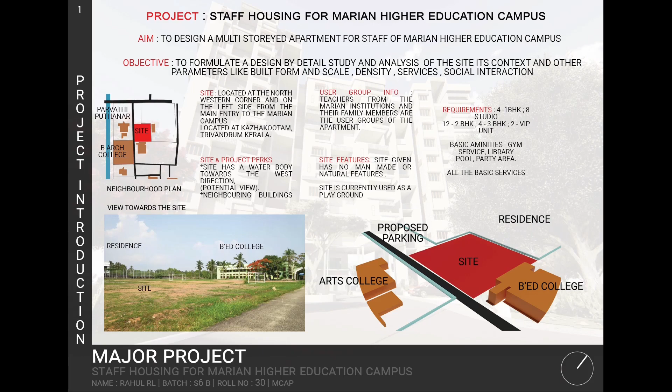Coming to conceptual evolution: the main conceptual idea is to bring a residence-like feel to the apartment, enhancing user comfort and traditional feels, achieved through factors like yard spaces, bringing interior and exterior relation, privacy and isolation for each unit, and providing more ventilation.

Now about the yard spaces. The courtyard I created here is a double height space connected to all the common spaces in the unit like the living area, dining, and the kitchen. This area increases and exposes the volume of the interior spaces, enhancing natural light and ventilation.

Further connecting to the other yard spaces, it brings openness to the building. By achieving the court space, the need for increasing privacy through privacy walls and an increase in ventilation through the newly increased volume is seen.

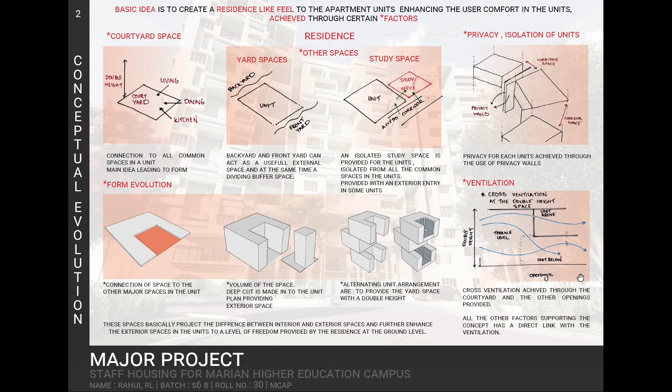Coming to zoning: zoning is done by factors like orientation. The orientation of the building is to avoid the summer sun by facing the court spaces against the sun, also aligning it to the wind direction, and to provide a good view from and towards the site.

Further, the site is zoned prioritizing pedestrian pathways by minimizing the road networks. The part marked in the plan is the park area, providing a buffer to the site from its nearby educational context.

Coming to unit level zoning: this is completely done prioritizing the courtyard space. The alternating plan provides the courtyard space with a unique privacy issue, which was solved by the privacy walls. The vertical circulation cores provided at each corridor are accessed by all three units, and the central units access alternate between A and C as going up the levels.

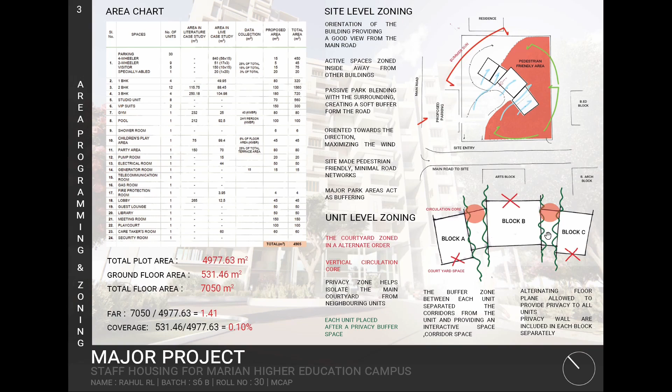Coming to the site plan, this shows both entrances to the site, the vehicular as well as the pedestrian. It also shows the road and pedestrian network throughout the site. The ramp to the basement parking is also shown.

Most importantly, both the parks, the active park and the passive park, are shown in the site plan. The active park, located at the back or east end of the site, has a playground, a cafe with seating, and a stage space, whereas the passive park has a children's play area and a seating space. Both parks act as a buffer from the context of the apartment.

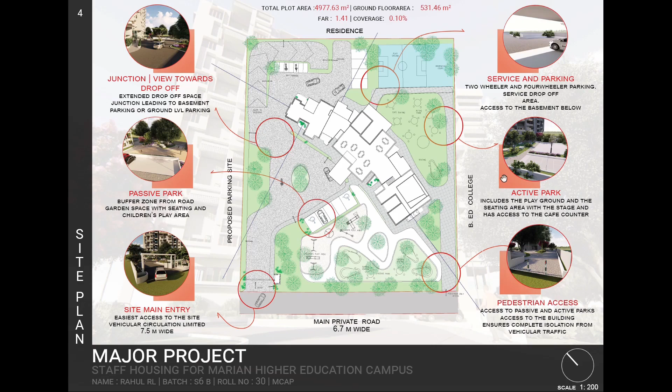Ground floor plan: the immediate site features are marked around the site. The reddish color in the plan denotes service areas and the yellow color denotes public areas. So the private areas like the caretaker's room, electrical room and other service areas are mostly connected to the road network, providing vehicular access to the service areas.

But the public spaces like the lobby, which is connected to the drop-off, and the guest lounge, the children's daycare, and the yoga center are all connected to the active and passive park. The children's daycare and the yoga center are directly connected to the passive park.

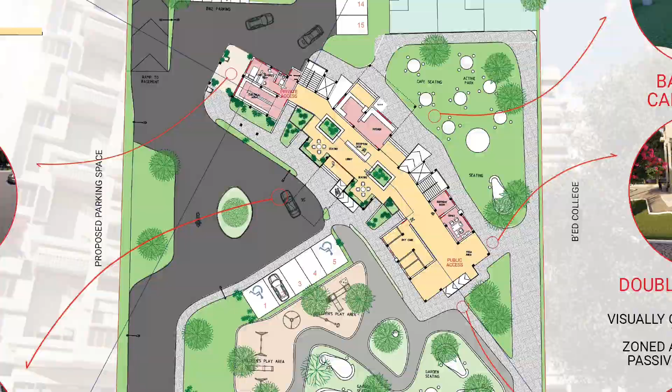Coming to other floor plans, starting with the basement plan: it has the rest of the 22 parking slots in the 37 total slots. The basement level is also provided with the STP, the generator room and the pump room, which all could be accessed by service vehicles and are also connected with their specific ducts.

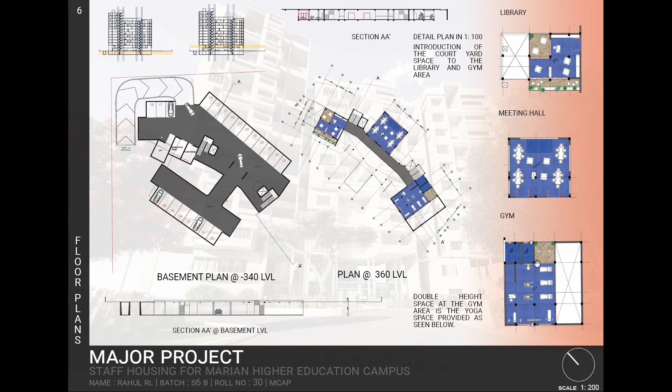Plan at level 360, or first floor plan: the main corridor has a seen-below space towards the ground floor. The corridor connects to the meeting hall, library and gym. The library and gym are provided with courtyard space and a balcony space, which provides good cross ventilation throughout these spaces.

Explaining the units in detail.

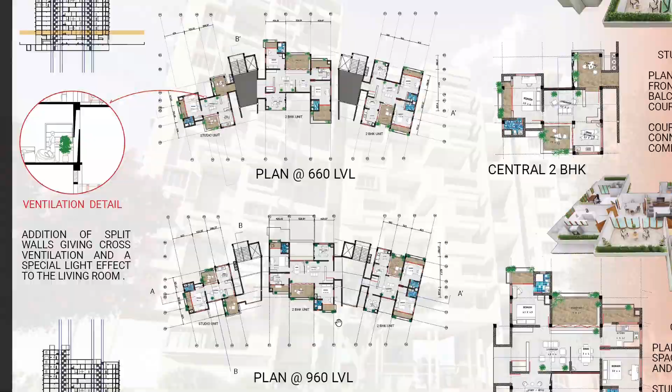This is the detailed plan of the studio unit. As the texture suggests, this is the exterior areas, the double height courtyard, a back balcony and a front yard. The courtyard connects to the living room and the dining plus kitchenette. A split wall is provided here, providing cross ventilation through the courtyard. A detailed isometric section explains it clearly.

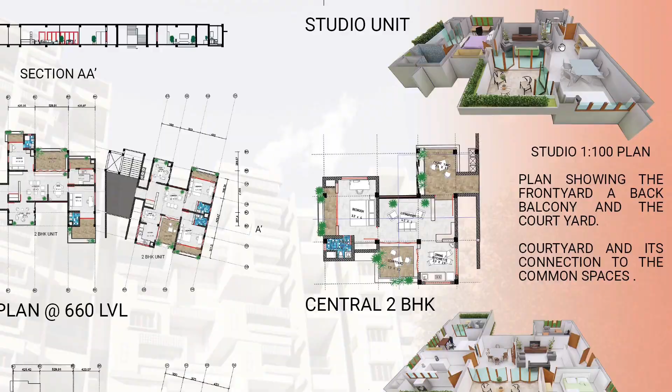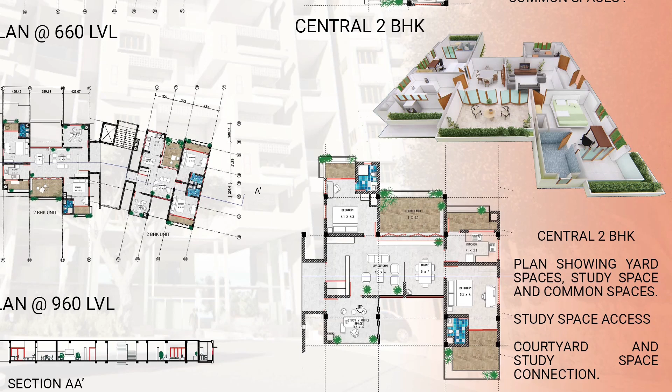Now the detailed plan of central 2 BHK. The idea of courtyard space, the backyard and the balcony spaces are all the same. The courtyard space still connects to the dining and the living. The 2 BHK has an addition of a study or office space, which is a user group specific place, so that the user can use it as either an office space, a class, a study or a workspace.

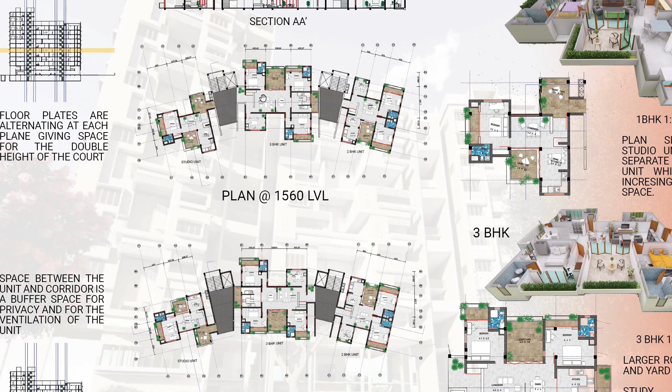Coming to plan at 1560 level and 1860 level. These plans again show the alternating arrangement of the plan and the buffer space between them, and also the circulation and the privacy provided for each courtyard space from the other units.

This is the detailed plan of 1 BHK and the detailed isometric section. The 1 BHK unit is similar to the studio unit, but the only difference is it has a separate kitchen unit rather than the kitchenette unit we saw in the studio unit.

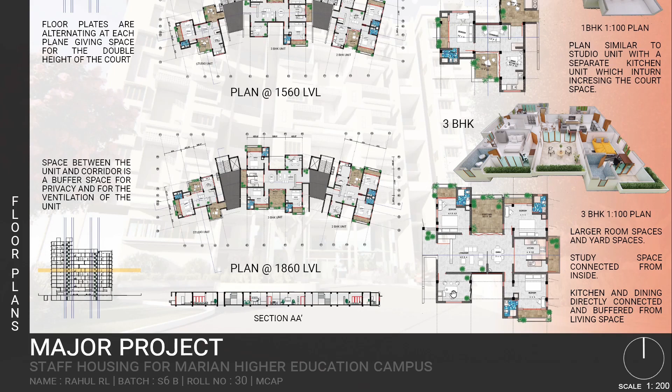This is the detailed plan showing the 3 BHK unit and the detailed isometric section. The 3 BHK unit has larger room spaces and larger courtyard spaces. It has its study area inside of the living room, provided with a buffer from the main entry.

Plan at 2460 and 2760 level. These levels contain a studio unit, a VIP unit and a 2 BHK unit, a studio and a terrace party space and a pool area. The terrace party area contains 2 levels, a seating level and a pool level.

These plans represent the alternating version of the previous plans shown. The basic idea of courtyard remains the same here.

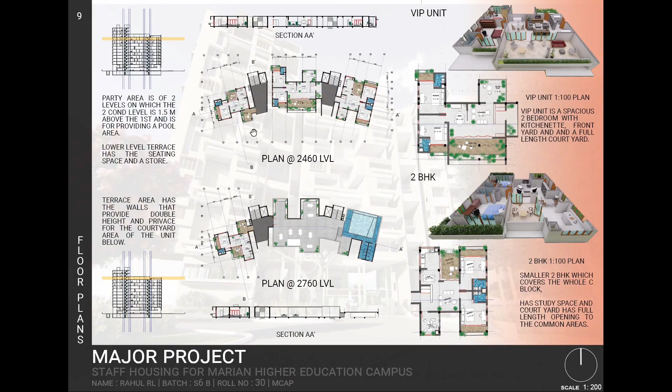The detailed plan of a VIP unit and the isometric section is given here. The VIP room consists of the largest courtyard space, connecting full length to the living and dining spaces. The VIP unit is a 2-bedroom apartment with a kitchenette provided inside.

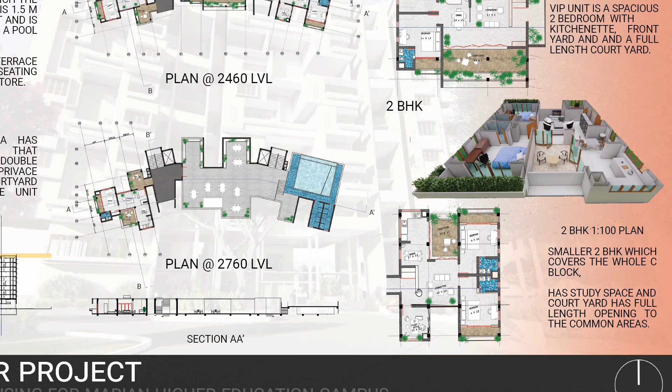Coming to the final 2 BHK, it is a smaller 2 BHK. The detailed plan of the 2 BHK and the isometric section is given here. Same as the earlier 3 BHK, the study unit space is inside exterior of the living room, providing a buffer from the main entry, which has its courtyard space with full length openings to the common spaces around it.

Now coming to sections, this is section AA, showing the largest section through the building, clearly depicting the buffer zones between and the courtyard spaces in between them, and all the rooms and their alternating plans could be seen in the elevation inside.

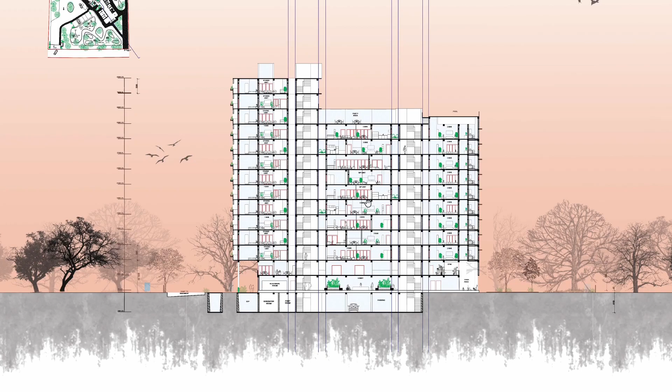Coming to section BB, this section cuts through the courtyard space, showing the level differences between the courtyard space and the common areas, and the split wall at the back could be seen, which is used for ventilation. The section also provides an idea between the common space and the courtyard space. The alternation in plan could also be seen.

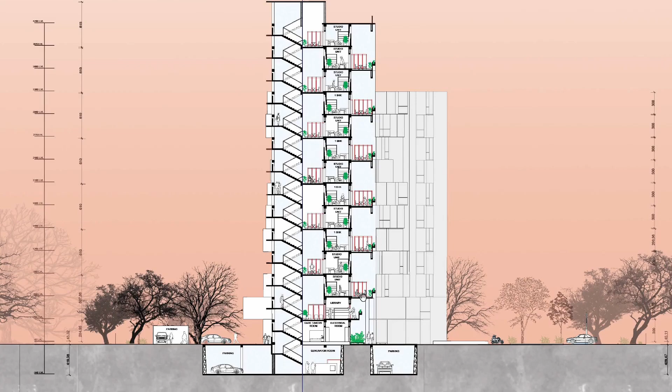Coming to the elevation, these are different elevations showing the various features and components used for the facade.

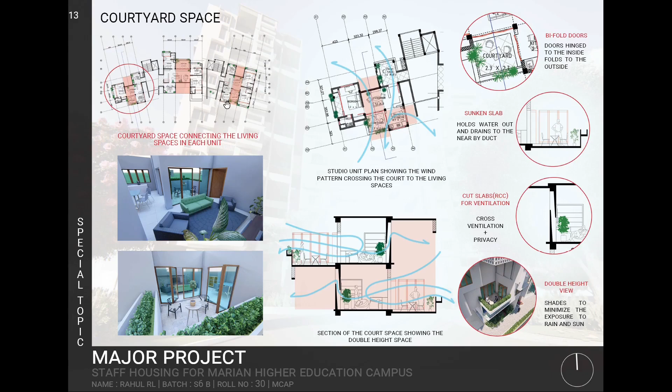For the special topic, I have taken the courtyard space. This plan shows the probable wind movement through the courtyard space and through the split wall provided behind. This section depicts the wind movement through the volume.

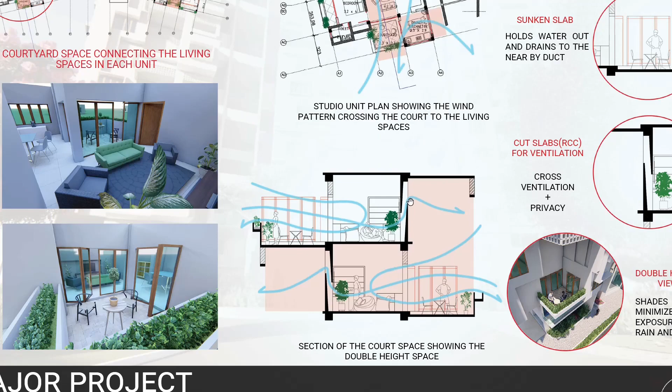Certain features of the courtyard space are usage of bifold doors for more extended openings, usage of sunken slab for preventing water from entering the building. Cut slabs are provided for better ventilation. Double height spaces are given for more volume difference and air circulation.